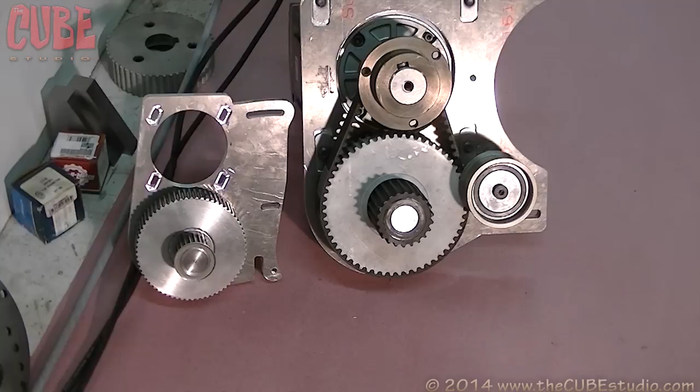As long as we're working on the counter shaft for the Mega, and I have the Ultra fat motor drives right up here on the bench also, I thought it'd be kind of fun to make a comparison of the two. On the right, of course, is the Ultra, and the counter shaft is that piece on the bottom with the big pulley, small pulley, and does the same function as the counter shaft on the Mega, although it's much larger and is much wider in belt, and it's also 8mm rather than 5mm.

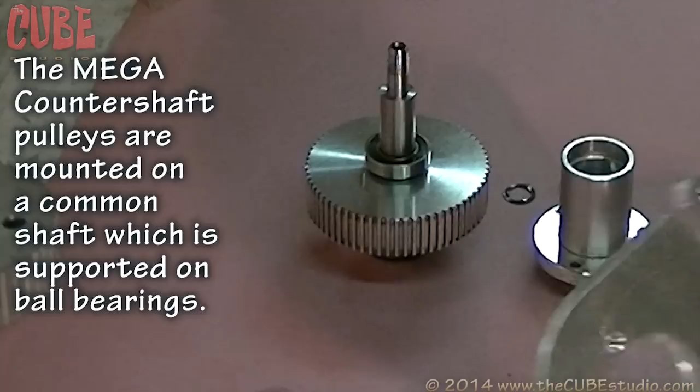Okay, what we have here is the most used Intern on the planet. This is my prototype. It runs pretty much every day, sometimes overnight. Hundreds, if not maybe even thousands of hours on it. It's a couple of years old. It's going to be replaced now by the Ultra, and this is sold. So prior to delivering it, I'm going to go through the machine and do all of the upgrades that have happened over the last 2 years, so that the customer gets the machine that's current.

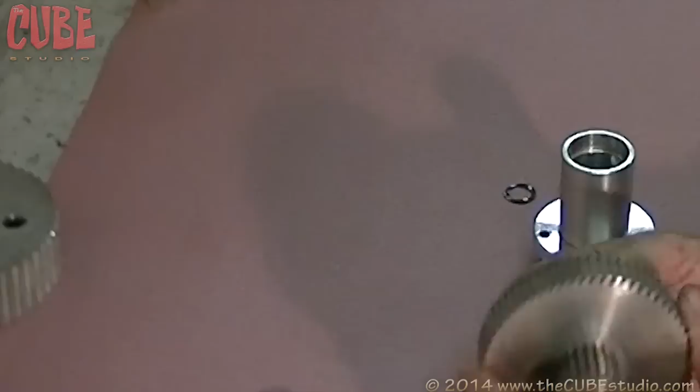What I want to show in this video is the counter shaft and the differences between the Mega, which is this, and the Ultra. The Mega counter shaft is one of the things that got upgraded because my prototype machine has been called on to do things that we were never designed to do. It's far beyond its actual capabilities, and it constitutes abuse, but that's pretty much what I'm known for.

The only failure on the machine, even turning 98-pound spindles for the Ultra, was the front bearing on this counter shaft. The complication comes when you design a part with this size bearing, and then you find out that you can't get this size bearing in a high quality name brand bearing that you want to use.

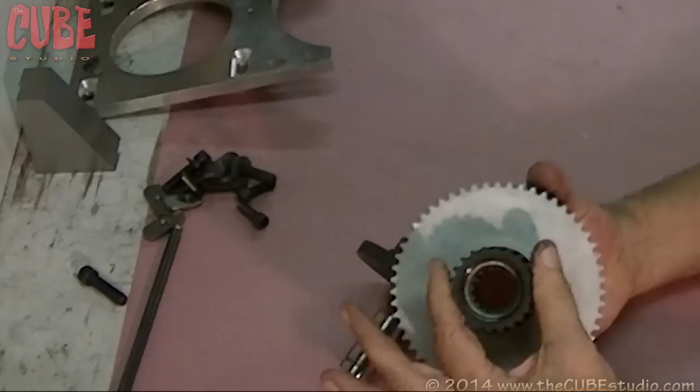The counter shaft for the Intern Mega is significantly smaller than this, and this is 8mm pitch belt, and this Mega's only a 5mm pitch belt, so it's probably about half of the size. But in order to be able to handle the 5 horsepower, which is what the Ultra is designed for, and that limitation is primarily with the belts. Also, when you run a belt around a pulley like this, the smaller the pulley is, the less horsepower you can run through it. So a lot of factors come into play when you're figuring out how much power you can run through the mechanism.

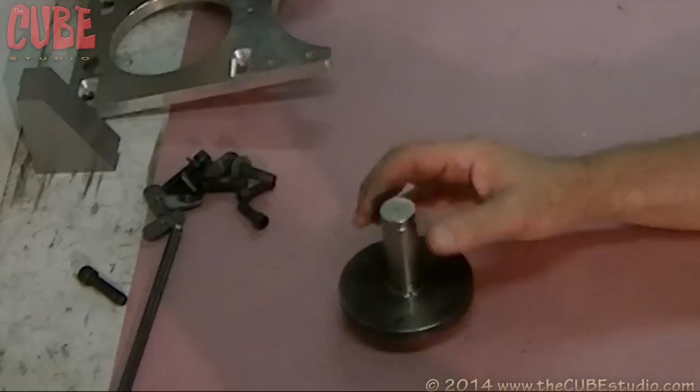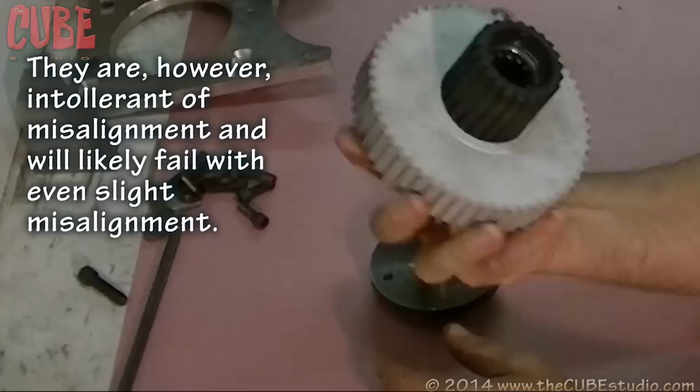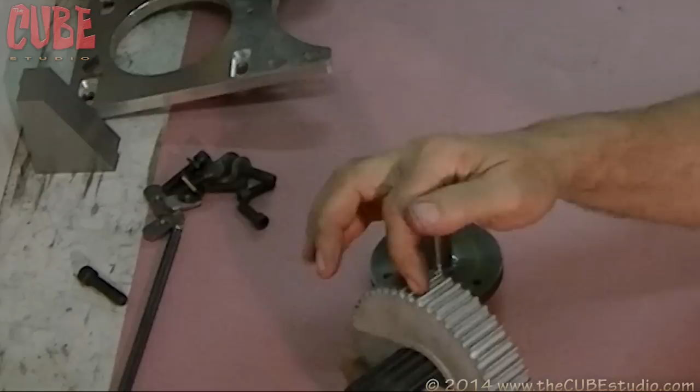This guy is a hardened steel pin, and this is steel. So this guy is a very, very rigid mount. And then by putting the bearings inside of the pulleys here, we actually can put a much higher load rating. These are precision rollers in there. It's a needle roller, but it's in a machined hardened case rather than the typical sheet metal cup that they put these in. So these kind of roller bearings, needle rollers, need to have seals in them, and there's 2 of them in here. So they're pressed in.

Here's the piece. This is for the 5 horsepower guy. This is for the 2 horsepower. These use the narrower belts. But it's the same part. It's this piece. This is new. This hasn't been blackened yet. So the aluminum pulley then gets pressed onto this shoulder and locked up.

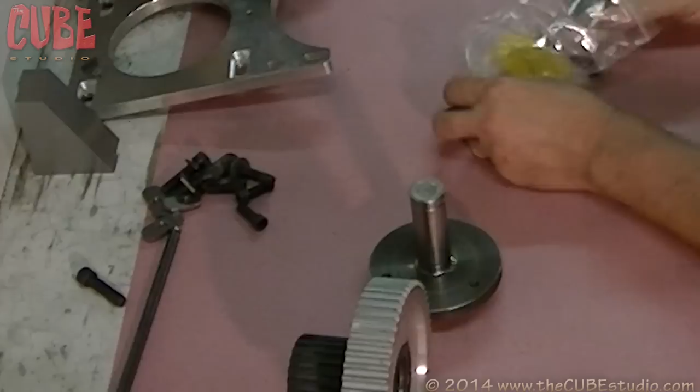So then inside of this go these needle rollers. So a needle roller like that gets pressed into here. It's not a big press fit. It's about 1/1000 of an inch. So it'll keep it in there, keep it from wandering around. And it's got a little oiler hole right here, and then it's also got this groove around the outside to distribute grease, but I kind of use it for a different purpose.

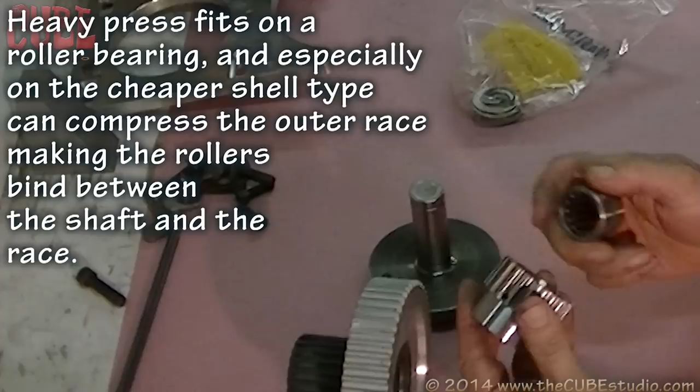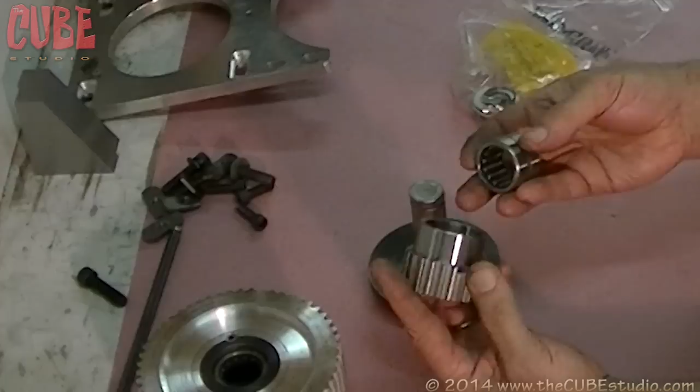These little set screws that are in here, this is pressed in, and the way you press that is you make a washer of the right thickness, so that when you press this down, it'll press in until the washer hits. So you get that exactly right. Now this, you see where this groove is aligned with that set screw, that's not an accident. So the set screw will go in and it'll reach into this groove just as a precaution, so that in the very unlikely event that press fit loosens up over time, the set screw will keep this from wandering around. So this is what this part looks like. And that reaches all the way through there.

The first design I had was there was a bearing in the big pulley and another bearing in the small pulley, and they were just pressed together right here, a very small amount. And I had a sealed ball bearing in the back. It's much bigger. So a sealed ball bearing in the back on this gear, and then the needle rollers on this, because there's not enough room for a ball bearing in this arrangement.

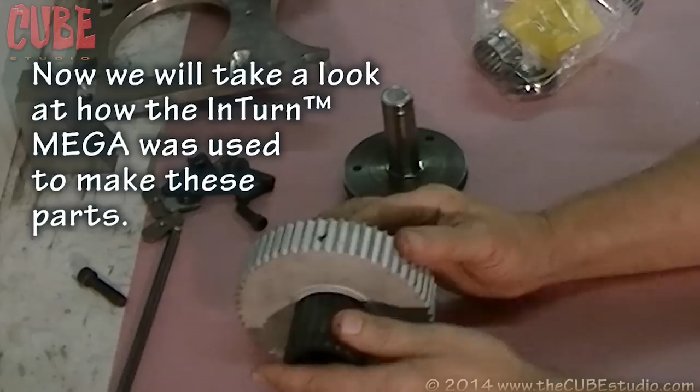But in my mind, I could just see these two pulleys rocking and over time loosening up. So I just really didn't like the idea of having an insecure connection between these two. So the solution to that was to take this, I'm going to call it the pinion pulley, and run it all the way through. So that's one solid piece of steel. It can't disassociate from itself, and it's not going to start rocking or come loose. It's one solid piece.

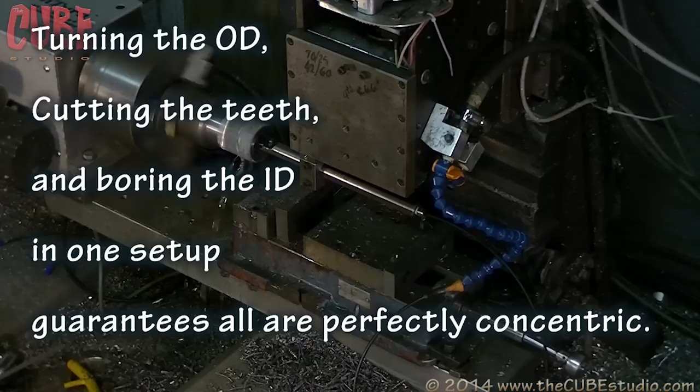And both needle rollers are pressed into this. So the back needle roller is still for the big pulley, but it comes through this case right here. So in order to do torque transfer, now there's set screws that go right through this pulley, and if you put set screws in the pulley, make sure you put them at the bottom of the tooth, because that way they don't tear up the belt. If they're at the top, it's not as good.

When we're talking about almost 5 horsepower pulling this outside belt, and then the torque multiplication going down to this, there's not really enough friction in 2 set screws. So this is an interesting trick you can do. In lieu of putting in a keyway, you can drill halfway between. Now this is steel and aluminum, but it's 7075 aluminum and 12L14. So in other words, it's soft steel and hard aluminum, so they're not that far off. Otherwise, it gets more difficult to do this kind of thing.

But you can drill halfway in between, and this is 3/4 of an inch deep, and then you tap that and put in a set screw. So that's what's going to transfer the torque. We're not going to rely on those little set screws. So this goes right on this guy, and there's going to be a seal in the back. So let's look at what we got in the way of a seal for the back of this thing. There's the seal for the back. So we might as well go ahead and stick that in there and put some grease in this sucker, because this is going together for the last time.

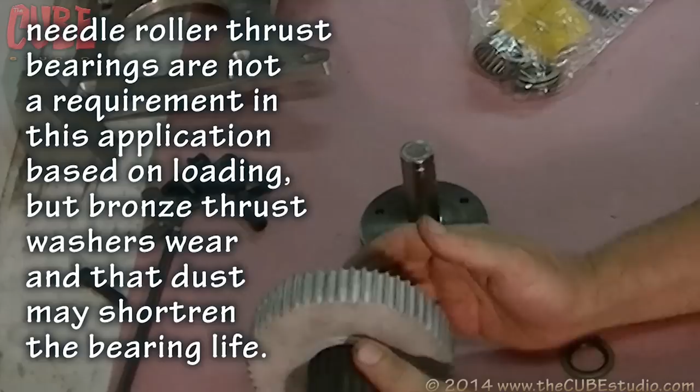So we have the back seal, and then, because these needle rollers don't locate themselves laterally on the shaft, we need some way to keep this thing from wandering this way. You can put a thrust bearing on either side, but that becomes awkward to disassemble if you ever need to. So the way this works is there's going to be thrust bearings, and these are the thrust bearings. It involves a little washer, then the needle thrust, and then another washer, and that's your first thrust bearing. That takes the thrust in this direction. It keeps this from walking off that way.

So we also need to keep it from walking back too far. So we need a second thrust bearing, and rather than put them front to back, where the back one starts to cause a problem with the seal and so forth, we're going to put them both in the front. The way that happens is we have a snap ring here on the shaft. That snap ring is going to be sandwiched between two needle roller thrust sets, and they can't go in either direction. And there's an internal snap ring that goes inside of this barrel.

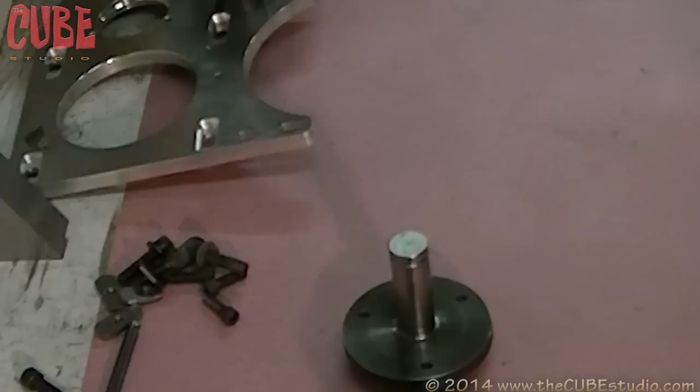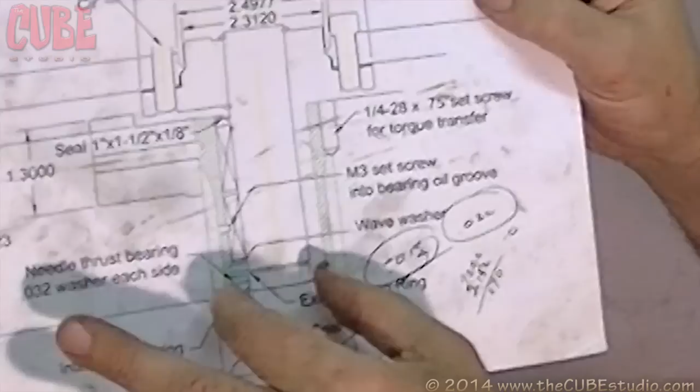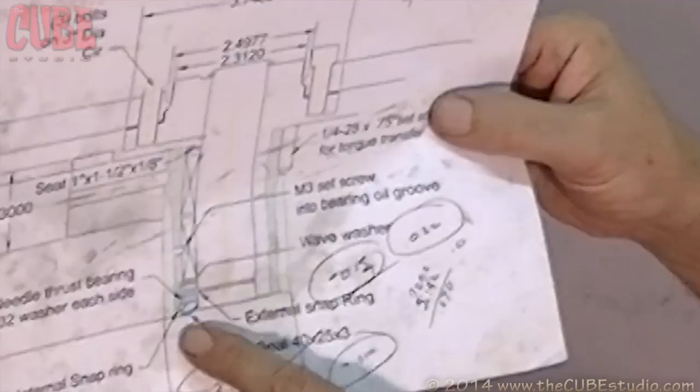So in the back we have a grease seal, and then a needle roller bearing, and in front of the needle roller bearing we have a wave washer. What the wave washer does is it keeps the pressure on without being too tight. It won't bind anything up, but it'll keep pressure so that this thing isn't fluctuating back and forth and making knocking noises. The next thing is the needle thrust, and then there's a snap ring on the shaft itself. Then there's another needle thrust, and then an inside snap ring, which is on the inside of here, and then finally another grease seal. So that's how the thing is arranged. So we're going to put this thing all together.

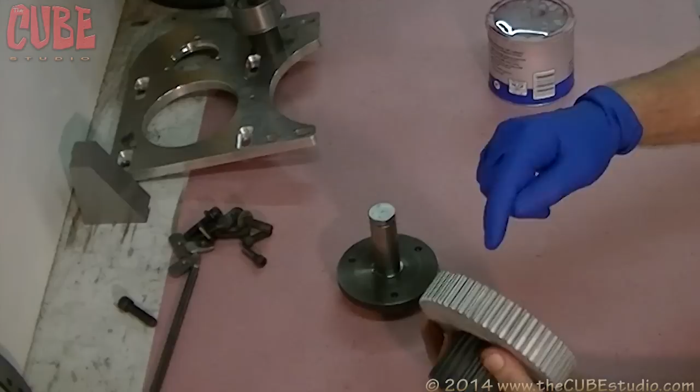So the first thing I want to do is, if you wanted to put a Zerk fitting or grease fitting, you could put one right in here. You wouldn't be able to leave the fitting there, but you could screw a fitting in, grease it, take the fitting out, and put a plug in if you needed to. We're gonna take the attitude that this is lubricated for life. So we're gonna put enough grease in there that this thing is gonna run for 20 years and not need any more grease. So we're gonna get plenty of it in there.

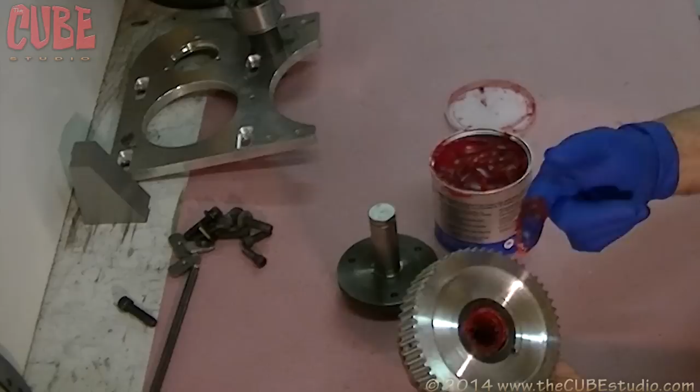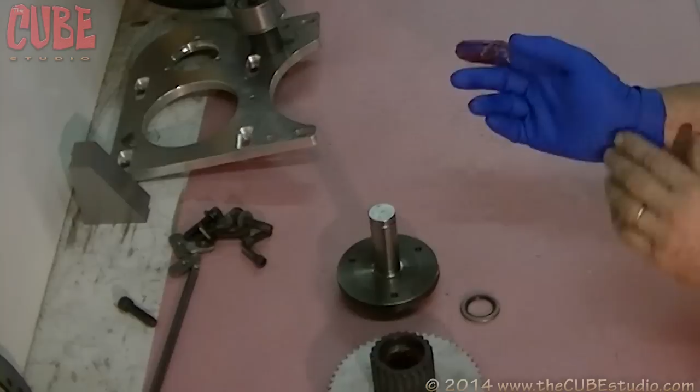But this whole idea of packing the grease so that there's not four molecules of space in there, really not a good idea, because as it heats up, all it's going to do is force that grease right out of the seals. And in some cases, it'll push the seal out with it. So we need enough that as a lifetime supply, this stuff will actually heat up and move around in there. I think that's good. Mobil 1 synthetic. Pretty good stuff.

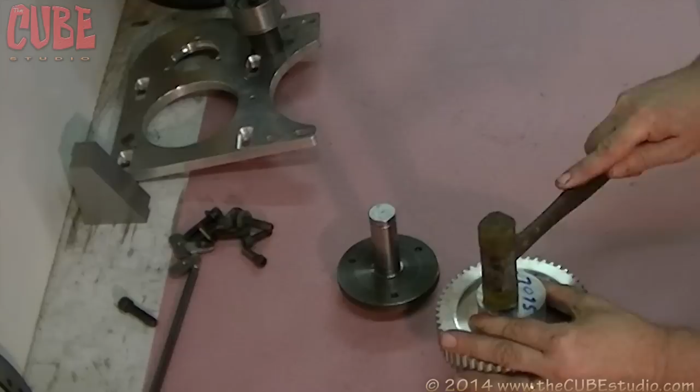So you get this grease on the back. This is only a little 1/8 inch grease seal. We want it to be flush with the surface. So that should be flush. So we're good to go there. So let's get this on here. Start putting cool stuff in the top of it.

All right, so the first thing that goes in is a wave washer. This is just a little piece of spring steel. You put it in there, you smash it between two flat surfaces, and it'll impart a little bit of spring. So we're going to put that right in there on top of that needle roller. And then when this washer goes on there, it'll press against the washer and keep all of these thrust bearings tight. All right, that'll find its way around. So now we got that in there.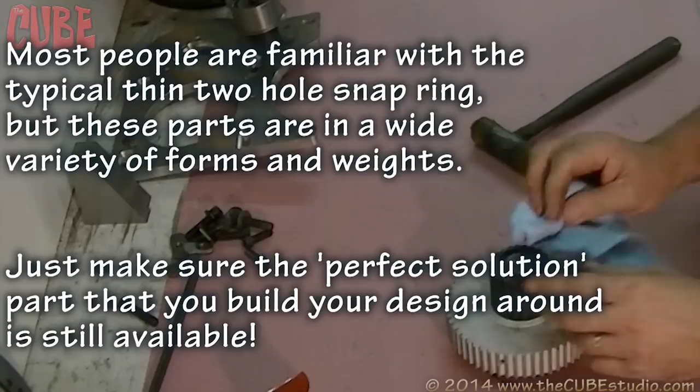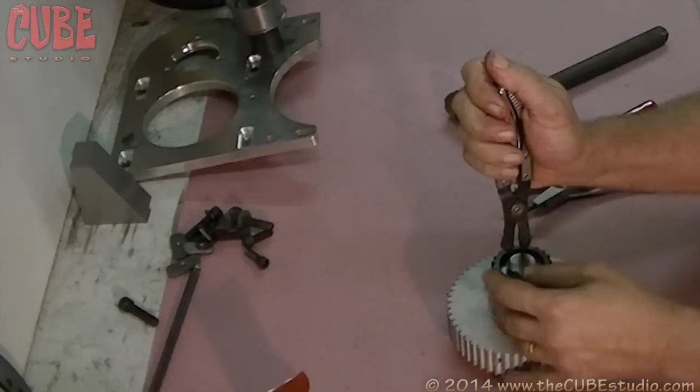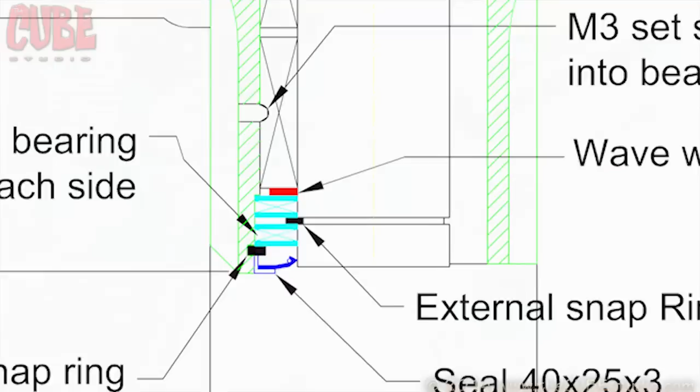The next thing that goes is a snap ring on the shaft, and the snap ring on the shaft is going to press against that needle thrust and compress that. So let's stick this guy in there. So this is what we got so far. We're getting some resistance now because of the seals and so forth. All right, so now on top of that, we have another washer because we can't run this against that snap ring.

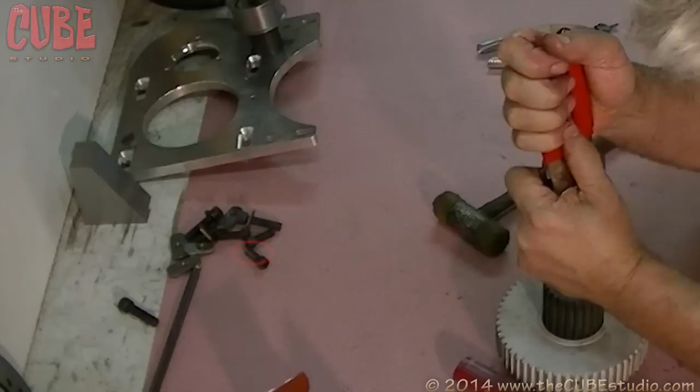Last washer. Again, I'm going to stick my fingers in this stuff. And that'll find its way around there fine. So now we need to get this big snap ring inside of there. If we push this down, hopefully we can see that groove. The problem is I have to compress this against that wave washer that's in there. The pin mount is on the bench and I'm pressing against that so it doesn't snap in. There we go. Alright, so that happens to work out.

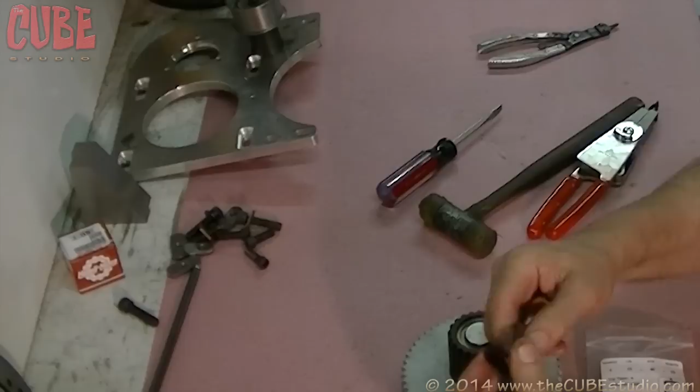So there's my seal for this side. Here again we don't want to tear up that seal lip. So we'll put a little bit of that grease on that seal lip so that it will pop on there.

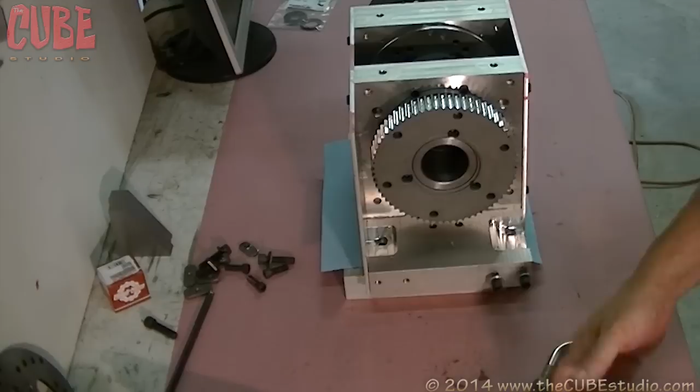Okay, we're back. We're going to put together the fat motor drive on the InTurn Ultra. This is the top plate for the InTurn Ultra. And this is a lifting ring. On this prototype, there's some clearances machined in on the inside. The production unit's just got a little bit taller frame so that this was unnecessary. But you don't want to just go crazy and make this thing tall because it has to fit under the mill head. So excess height is not a good thing.

So typically what you would do to lift the InTurn, and this particular one with the fat motor and the fat motor drive, just the InTurn and the fat motor drive is 140 pounds. So we really don't want to be trying to carry that around low. Now most of these go on an outrigger plate, so the outrigger plate would space it up, and plus it's hanging off the edge of the mill table. So this loop right here that comes down actually falls below the level.

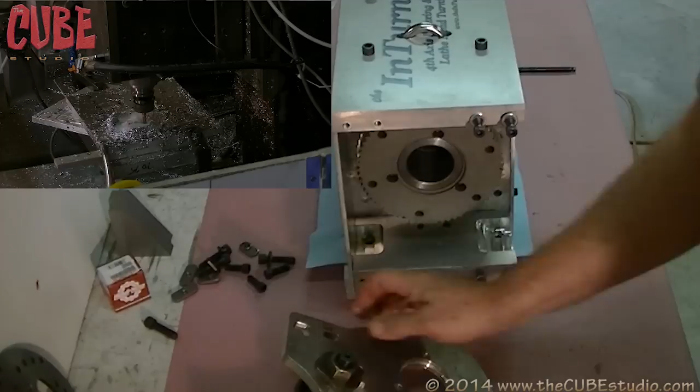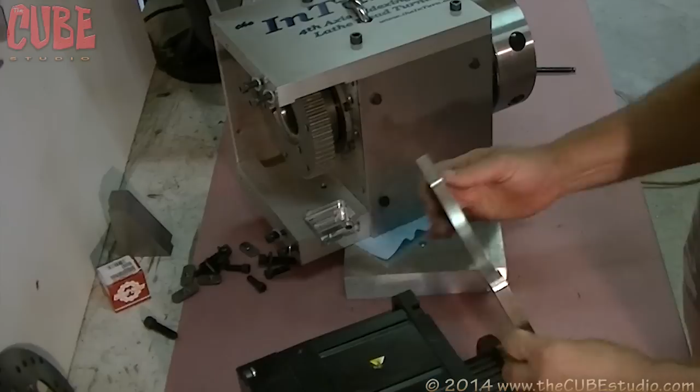So I'm going to put the fat motor in this first. Let's see if I can get this out of the way so you can actually see what's happening. Alright, pull this guy over. And this way. Okie dokie.

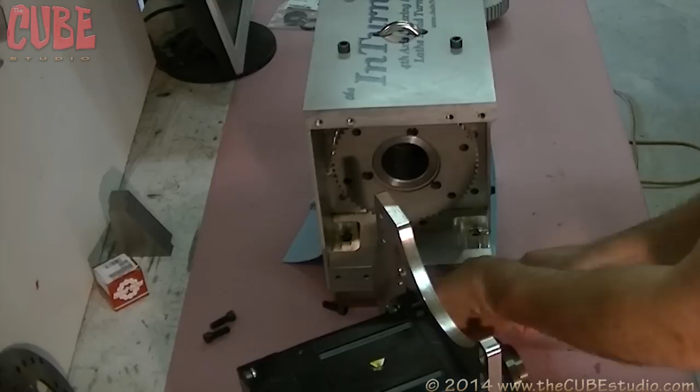The reason for the ultra heavy top on this is because of the fat motor drive as part of the motor mount. So lift this guy up, our eccentric in, put him back down, put the bolts back in.